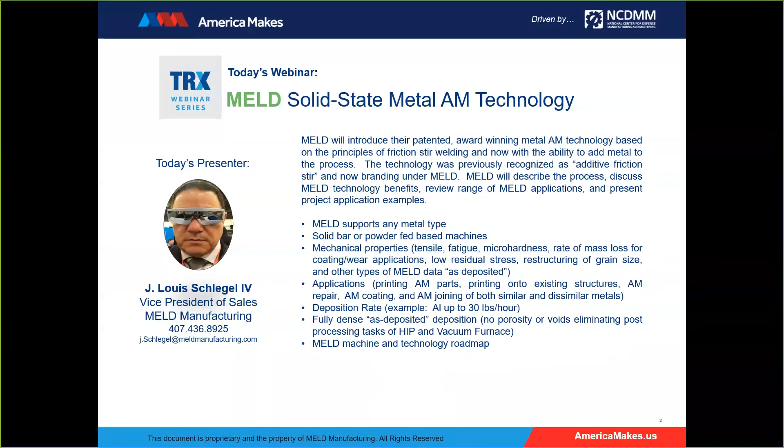I'd like to start off with a different way to start the pitch. MELD has been developing the technology for 10 years. We've been working with beta customers for 4 to 5 years. We've been selling machines a little over 2 years, at least began to launch our commercial machine about 2 years ago, with University of Alabama being our first customer. We came out as a new company, MELD Manufacturing. We were previously branded as Additive Friction Stir, and of course we wanted to create our own vocabulary, so you have to say the word MELD. That's the story behind MELD.

We're a small business, woman-owned. What I like to do is just say we came out in April, and within a week we were awarded the AM Innovator of the Year award at the Rapid Show down in Fort Worth, Texas. We were awarded a golden award from R&D 100 called the Market Disruptor, as well as an R&D 100 winner. The Automobile Association has given us an award through SAE Tech Briefs.

My point is there's lots of additive manufacturing technologies popping up, kind of like the whack-a-mole fair game, if you've ever played that before. And you don't know which to spend time on, which to invest in, which to spend resources towards evaluating technology. So I just start off with saying, in less than 10 months, for all these awards to migrate over to MELD, our technology may be interesting. My goal here is to present the technology so you'll agree that it is interesting.

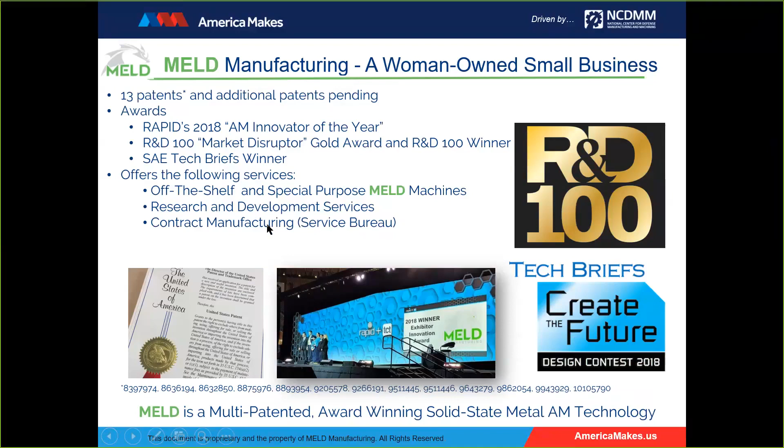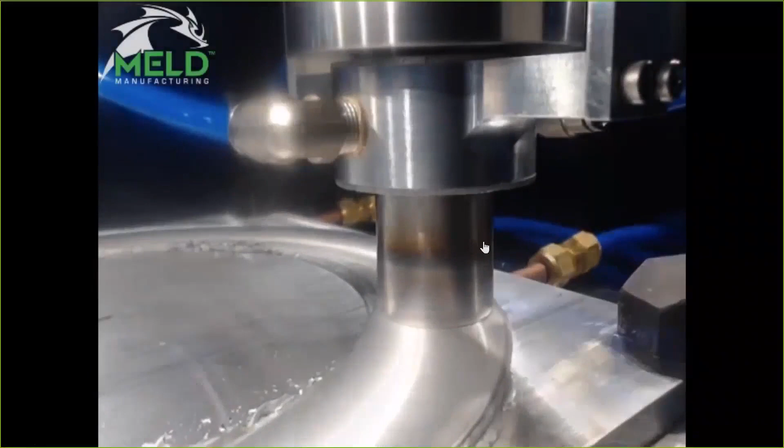I'm going to start with awkwardly flipping over to my browser to show you a video that shows the process. You can see the MELD tool spinning at high RPMs. We monitor two main variables: RPM or torque speeds, and then with a ball screw or with a linear force. And we deposit any metal type, I'll get more into the mechanics.

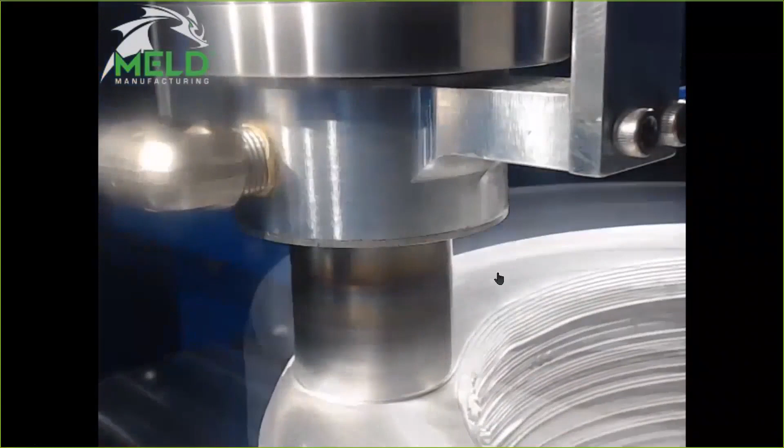But here you see us printing aluminum 6061. The Z-axis height is about 1 millimeter each. We're a high-speed deposition process. We've achieved with aluminum up to 30 pounds an hour. That's pretty darn fast. It doesn't mean every application is 30 pounds an hour, but that basically assumes a 2-inch wide track.

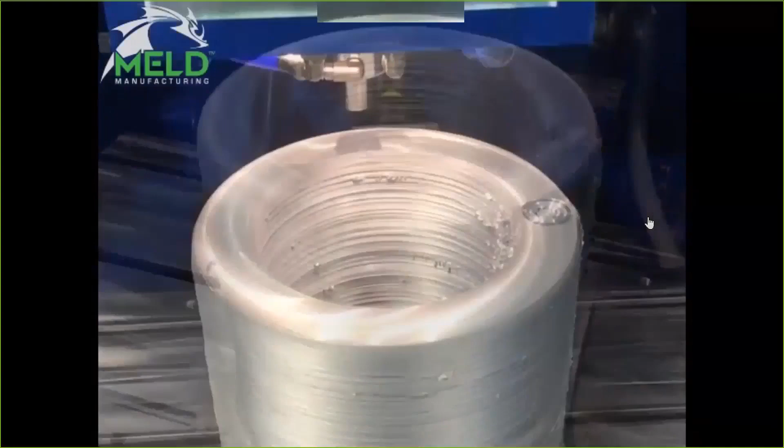So right there you just saw a video, let me get that out of the way now, sorry, of a project where we just recently printed a 285-pound cylinder. That's as much as I can go into at this stage, but it has obviously an end-use application, and we were permitted to show that little video there.

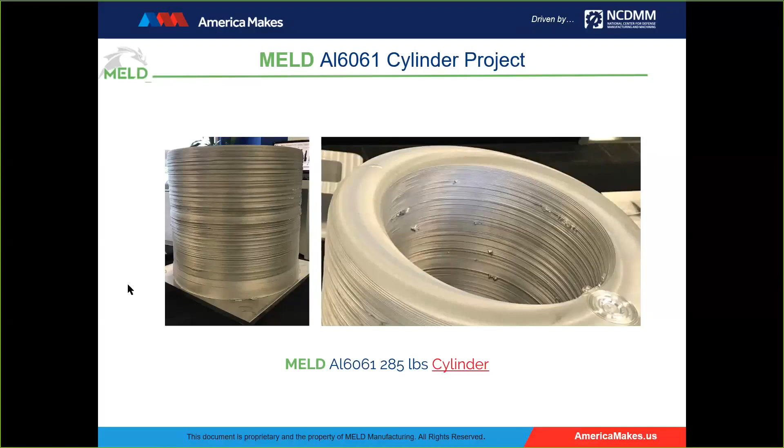And now to get back to my presentation. So MELD is a solid-state metal AM technology. It's an emerging disruptive process because we extend the applications of friction stir welding, and now we transition to an additive manufacturing repair process, enabling previously unjoinable configurations by allowing us to add metal in situ.

A friction stir welder has a solid tool with a solid nub. Ours is similar, except we have a hollow cylinder, and we insert a solid bar or powder into it. At the bottom, that pin is our feedstock material that we're adding to the application.

So again, you see the example here. Now we're making a rectangular platform, but through RPMs and linear forces, we're able to heat that material via friction forces up to about 80% of its solidus point, and then we begin to print the metal. So we don't melt it. That's the key to our technology. We don't melt it, and therefore it's a solid-state technology.

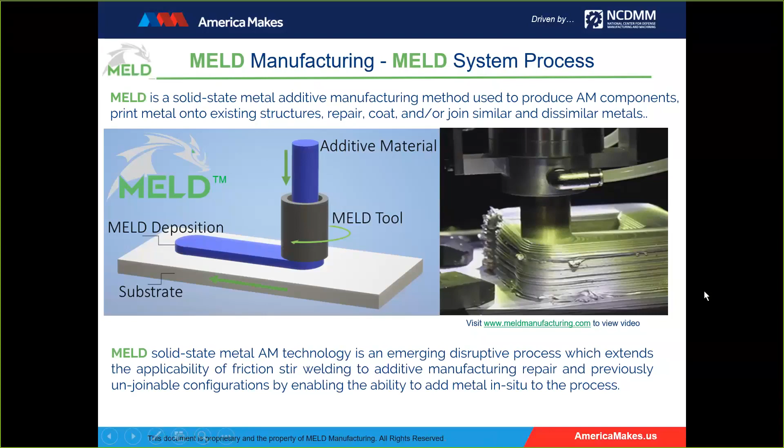With that, we're able to configure it with a solid bar or a powder. We highly recommend the solid bar because it's a lower cost raw material, readily available off the shelf from various sites. You can find 3/8 of an inch square solid bar readily off the shelf. But again, we can add powder hoppers to our machines. We're not picky—it can be fine or coarse, from nano to a couple of millimeters in sphere volume.

We're able to process both solid bar and powder. But again, the solid bar, because it's less expensive, has less handling issues and less storage life issues with respect to the powder. Still, it's a multi-feed process, either solid bar or powder.

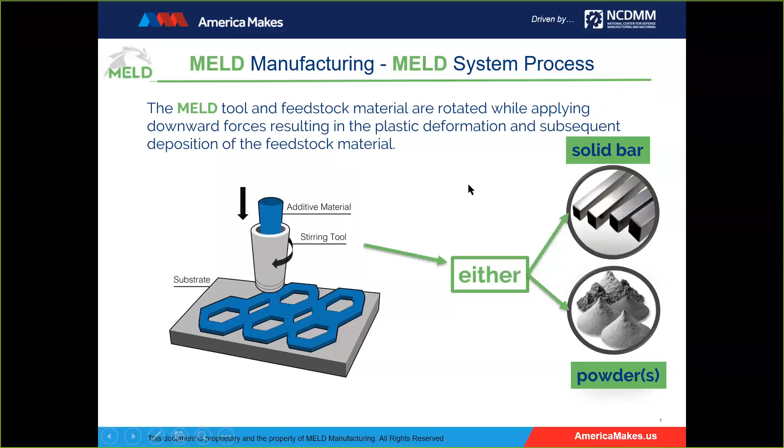Whoop, whoop, whoop, whoop. Sometimes I throw in sound effects.

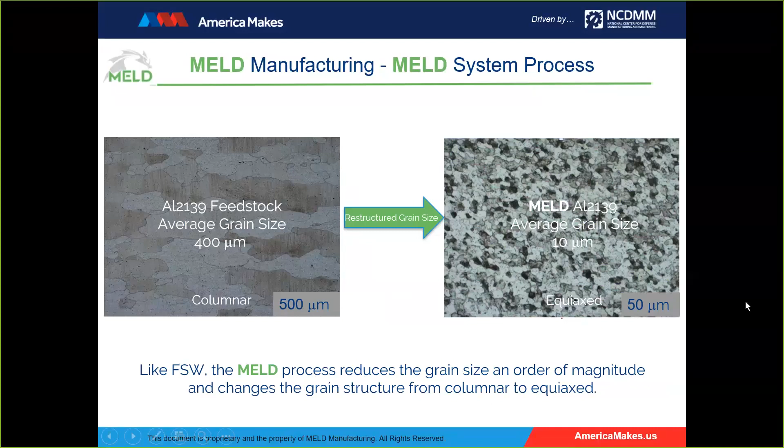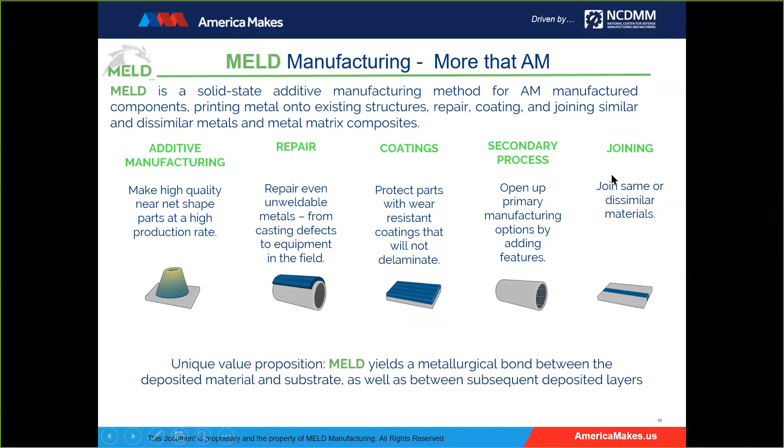All right, so what do we do? We have a wide range of applications. I have some slides on each of these, but here's just a quick overview. We can manufacture near-net shaped parts. There's large demand on our repair side because of the ability to repair unweldable materials, with examples. Coating has been a home run with regards to rate of mass loss. As a secondary process, we can print onto existing structures or components. And again, joining, as noted with the friction stir welding capabilities of our equipment.

Now to get a visual on some mechanical properties—one of the things we claim is you can choose any metal type, and I might repeat this like a Southern Baptist pastor a few times as I go through the series of benefits, but choose any metal type. We can use any aluminum metal type. On the left, I've got a cast aluminum, a couple of powder bed aluminums, and our mechanical properties of AL7075. I want to point out we're not comparing apples to apples—7075 should be a much stronger material, but again, you've got the flexibility of using any metal type, and a visual showing really good mechanical properties.

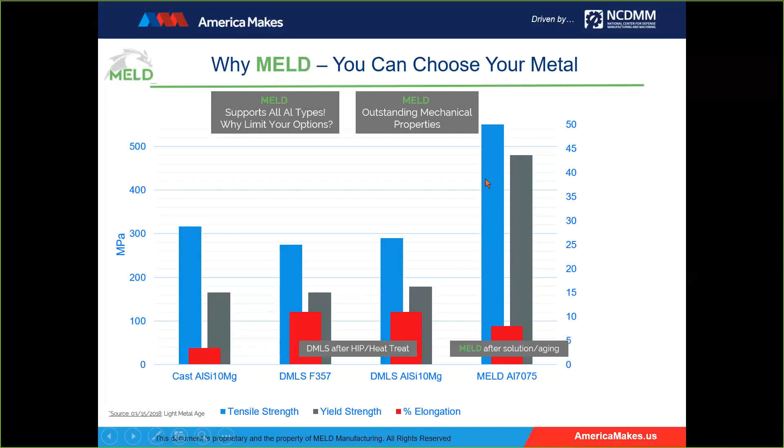The next slide is very similar—same cast, same powder bed, AlSi10, and now you see that same 7075 as-deposited and after our heat treat. In many cases, our as-deposited mechanical properties meet the required mechanical properties without a need for heat treat. And if we want to bump it up, we have our own custom blends of heat treatments to improve the mechanical properties.

So again, a quick overview—you choose your metal, and here's a comparison of other technologies, shown as deposited or with a heat treat.

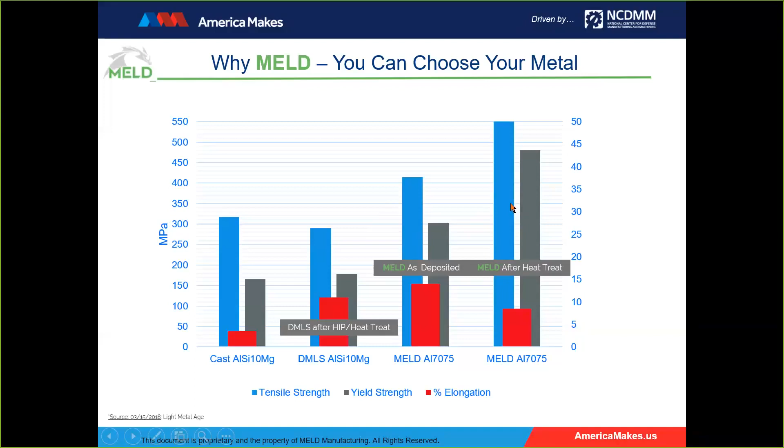It's got really good mechanical properties. I hope to expand on that in a little bit. So far, aluminum is the only material that we've heat treated. The rest of the materials' mechanical properties are well above the threshold without the need for a heat treat protocol. I'll show that with Inconel 625 coming up.

Again, choose your own metal, any metal type. This is just a snapshot of some of the metals we've worked with. Friction stir welding started off with aluminum, so we started off with aluminum too. We've got a lot of data on the complete families of aluminum, including NAB, nickel aluminum bronze, for like a Navy propeller shaft or propeller, magnesium, copper. We've done work with titanium, steel, nickel, and a number of MMC composites, which I have one slide on coming up.

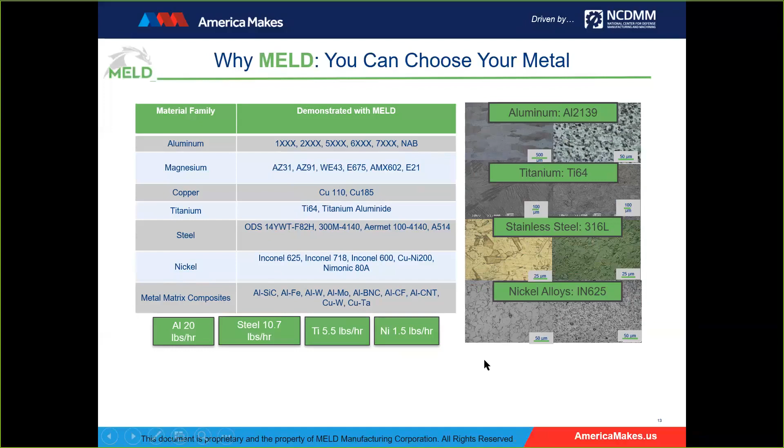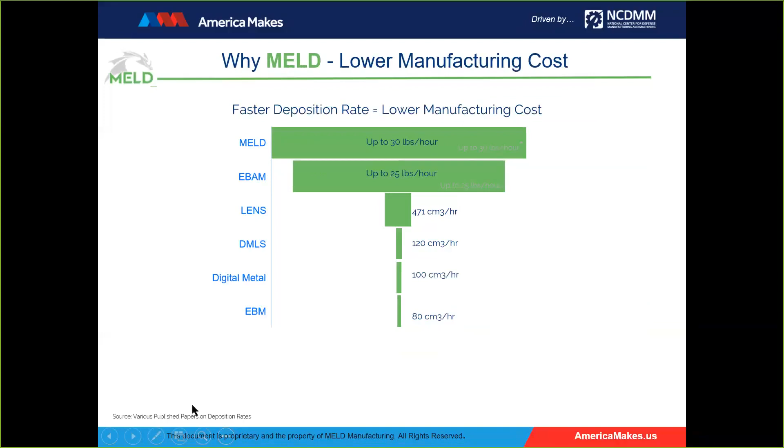So again, it's any metal type, with a fast deposition rate. I mentioned 30 pounds an hour. Here's just a visual on deposition rates of other technologies. I put my sources on the left-hand side, so I'm pretty reasonably accurate with all my data.

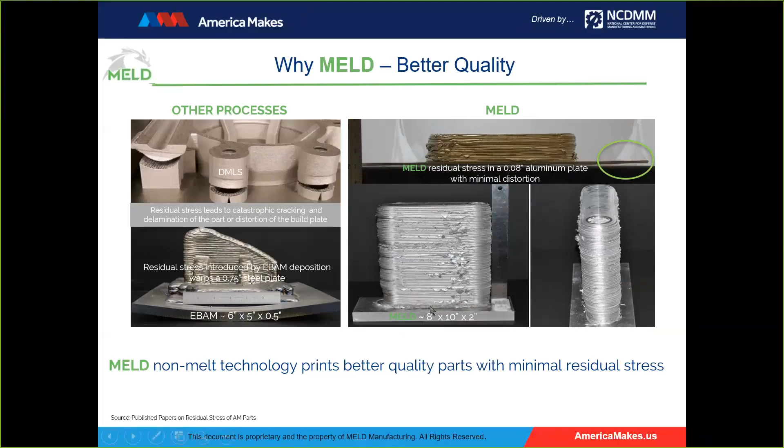And in fact, we did a project a couple of years ago where we incrementally reduced the plate thickness to see when we would observe residual stress, and we got down to 0.08 of an inch, a very thin plate, before finally showing signs of residual stress with a little uptick on the outside part of the plate. Again, don't want to oversell this - we're a solid state technology, we don't melt the material, so you should expect low residual stress, but there's some visual verification of that.

I'm going to get into some applications now. I'm going to go through a couple of repair applications because we found surprisingly large demand for this, especially in repairing cast and forge, replacing cast and forge applications, and repairing cast and forging molds and so forth. Here's an example to hit home on the technology in terms of addressing unfriendly materials.

Here's a cast magnesium helicopter transmission gearbox. That rib is prone to failure. The moment it cracks, it becomes an $80,000 piece of scrap material because magnesium is unweldable. But it's not unmeldable - we use the same cast AZ91 magnesium. We machined down the rest of that rib and deposited a number of layers, that's a 1/2 inch track here, of the same material. So again, any metal, or we can use the original indigenous material for repair, so there's no politics about a substitute material. If it's magnesium, we use the same magnesium. And that was a home run - we demonstrated the ability to repair that magnesium-based application.

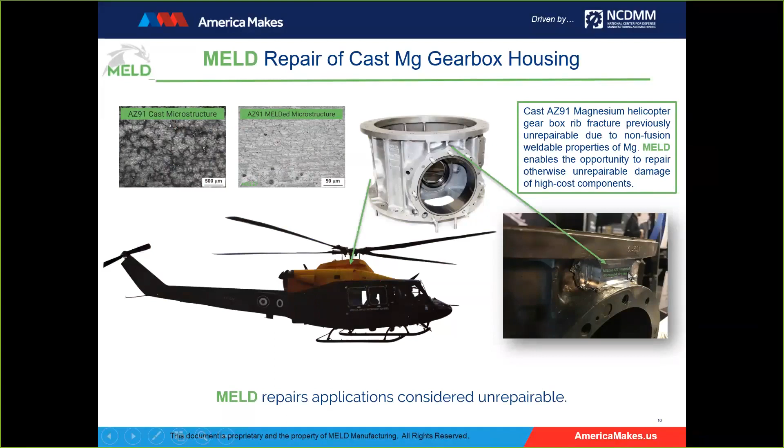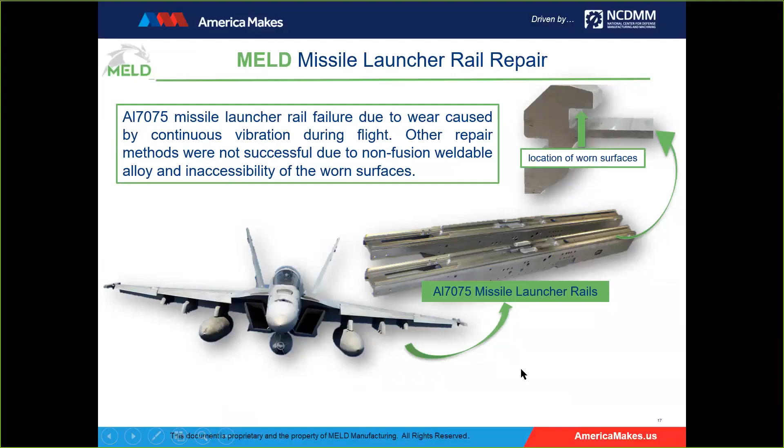Another example had a two-hit challenge: another unfriendly material for repair, 7075, but also the location. I call it the location from hell, because the underneath of that bracket wears over time from flight vibration. There's this 7-foot long missile rail launcher, just a series of long brackets. You're sliding the missile into that rail - it's on the jet fighter - and with vibration over time, it begins to wear out the underneath of the bracket. So how in the world did we solve that problem?

MELD has a couple of amazing, miracle benefits - sorry for hyping that up a little bit. We placed the MELD tool on top of that. It's about a 1/2 inch gap, or a 1/2 inch thick bracket. We put the MELD tool on top, a 3/8 inch solid bar of 7075 aluminum, and began to push material from the top, extruding it through the bracket.

We push out the worn material below the machine line, machine it back, and voila, home run for MELD.

We demonstrated the ability to repair unfriendly aluminum at a location that was very difficult to get to. That's about a half an inch, and we pushed material through, because I'm going to show another example of repairing a Navy propeller where there are lots of pits significantly less in depth. I'll reference that when I get to that slide.

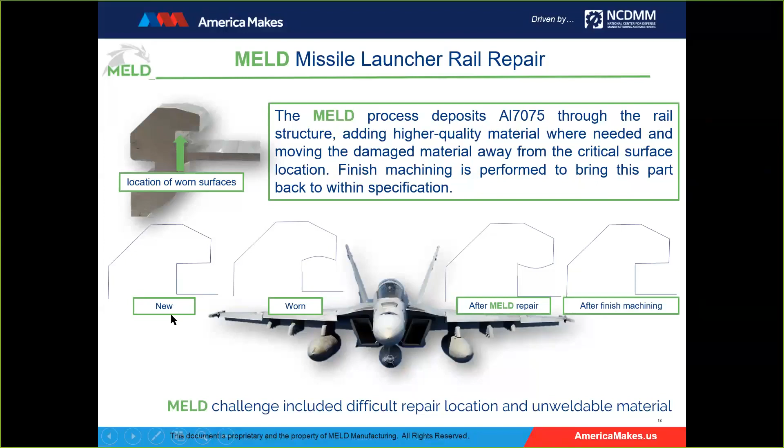Here's an example with the Army where we demonstrated the ability to repair combat vehicles, mostly aluminum 2024. We were given a plate with a series of simulations of armor-piercing holes and a variety of cracks. We deposited fully dense material.

Okay, there's my next one: any metal type, indigenous material, now fully dense. And that's a weasel word because it means many things to many people. Our definition is no porosity, no voids. There's no need for a post-HIP or vacuum furnace, and that's what fully dense means to us. We get better than wrought mechanical properties, which I'm going to show coming up.

The main purpose was to demonstrate the ability to repair combat vehicles in the battlefield, and we passed this first round of tests.

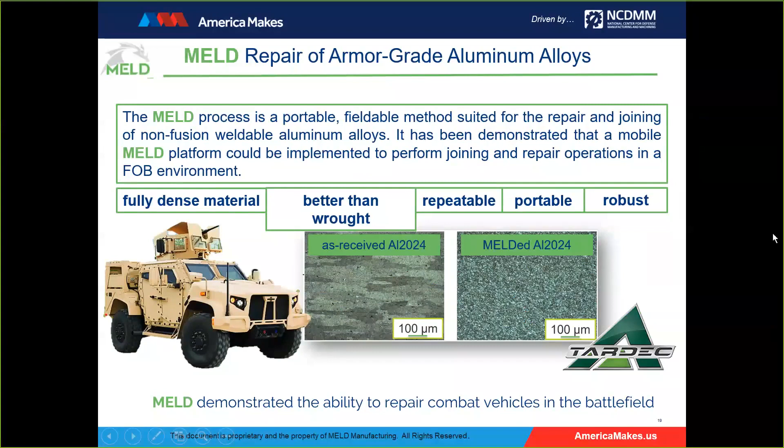We've gone into a SERDP project where they're actually taking battlefield scrap and shredding it into little chips, little scrap pieces. You can see it's not very attractive. Again, we said any powder type — we're not picky, from coarse to fine, and that certainly meets the definition of a coarse material. We demonstrated the ability to print that recycled material.

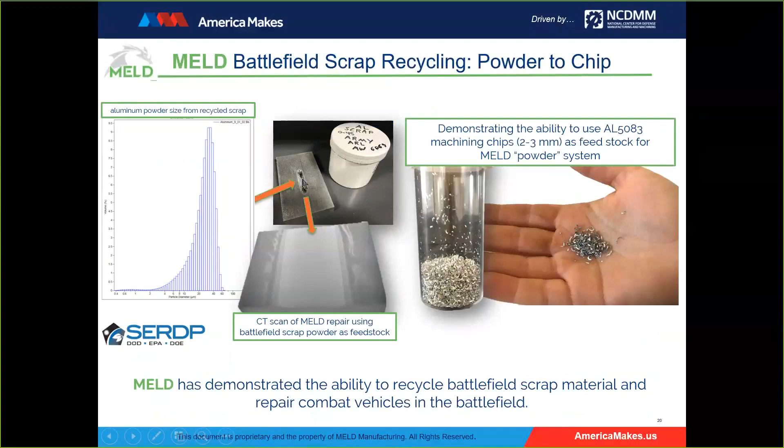So putting that all together, we're looking at now with the Army setting up a machine to place a large robotic arm on a transport vehicle, attach our MELD head to it, and repair combat vehicles in the battlefield. For instance, if this tank had a large section missing, we could print a near net shape part and meld it into place at the closest MRO to the battlefield.

So that's kind of a visual about where we're heading with some of our purpose-built machines. That machine would also have the ability to add hybrid tooling or subtractive manufacturing. I think in the battlefield, no one's going to worry about how pretty it is — it's just that we melded it with the same 2024 aluminum.

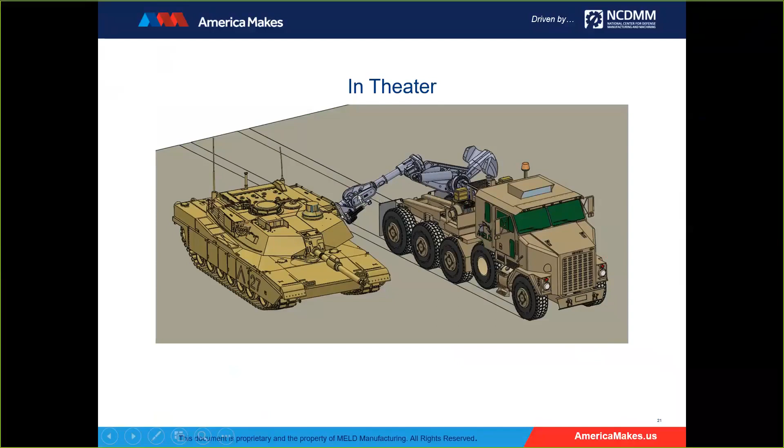I'm going to get into some coating. I just do a family of repairs, many more, but I'm time limited.

So here's an example of coating. What I see here, we start off with the traditional cold spray, thermal spray, and MELD, all using Inconel 625. I've got a series of about five slides coming up on a project that hits all the highlights of the MELD process benefits. So I look at cold spray and thermal spray, and you see the traditional challenges with the technology in terms of voids and porosity, and depending on the surface area of the application, a reasonably long time to prepare that surface before the coating.

By comparison, we do no surface prep. We immediately meld the material onto the application. We get a fully dense bonding because at that interface, we plasticize both materials. In this case, this is the Inconel and this is HY80 steel. So we're joining dissimilar metals, plasticizing them both at the interface, creating a strong metallurgical bond.

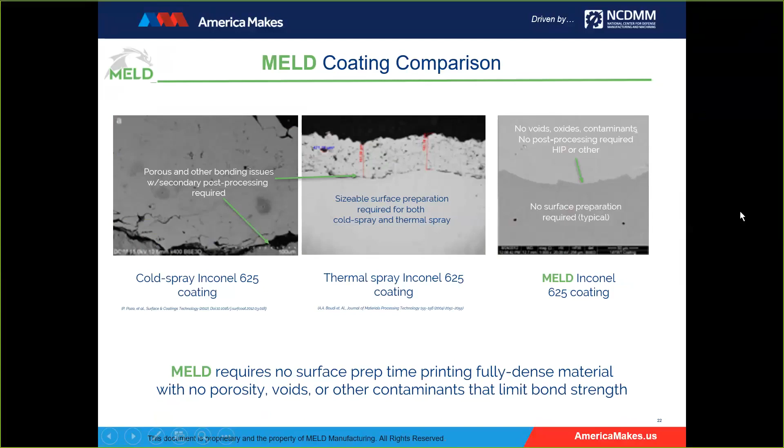Now I'm going to walk through that application to point out all the capabilities of MELD. We got engaged with a Navy submarine propeller shaft made out of HY80, coated with Inconel 625 for wear resistance. I'll start off with, we had a sample that was corroded.

You just saw this on the other slide. We immediately deposited with no preparation, fully dense, which to us means no voids or no porosity. We have eliminated any pathway for corrosion to work, and any way for porosity. So I'm emphasizing here how we handle corrosion — in this coating application, there's no vehicle, no pathway for the corrosion to work back to the surface.

Here's a snapshot of the mechanical properties. Here's the prevailing technology, slag surfacing. Our mechanical properties exceptionally exceeded the requirement. Don't want to oversell that — that's the spec, so unfortunately all I can say is we exceeded the mechanical property requirement.

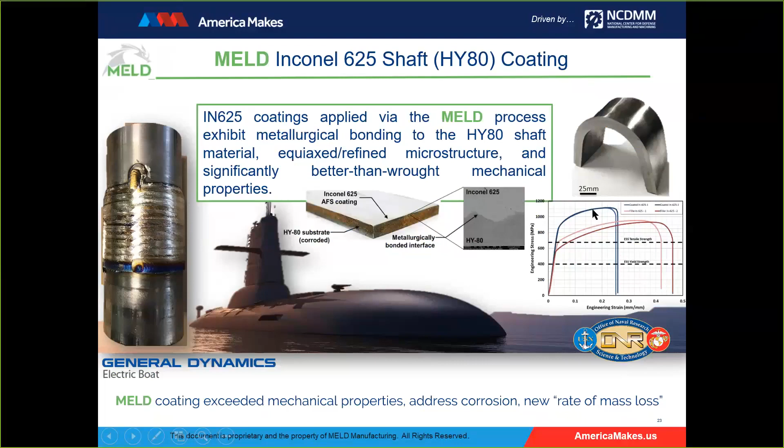Of course, we passed the bend test in terms of no delamination or cracking. Again, we get a strong metallurgical bond. So you now begin to see the interface layer between the Inconel coating and the HY80 submarine propeller shaft — you see layer to layer.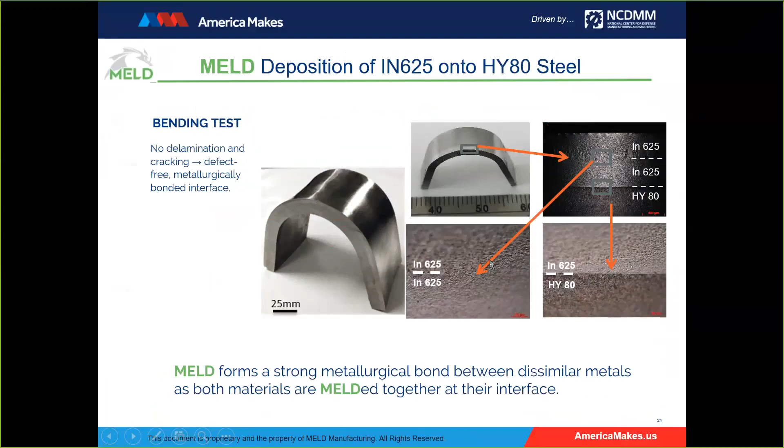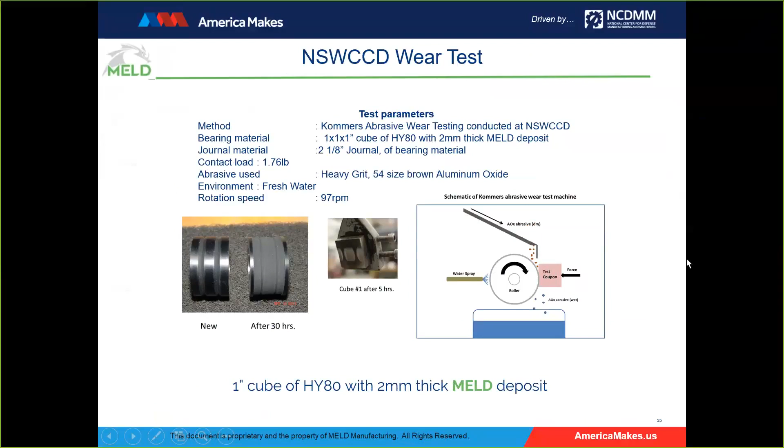But the whole purpose of coating is to get a lower rate of mass loss — that's the whole purpose of wear resistance. And so there's the standardized test: we took a one-inch cube of HY80 steel, we melded a couple of millimeters of Inconel 625. This is the wear test, and the results were pretty impressive — we set a new value for rate of mass loss.

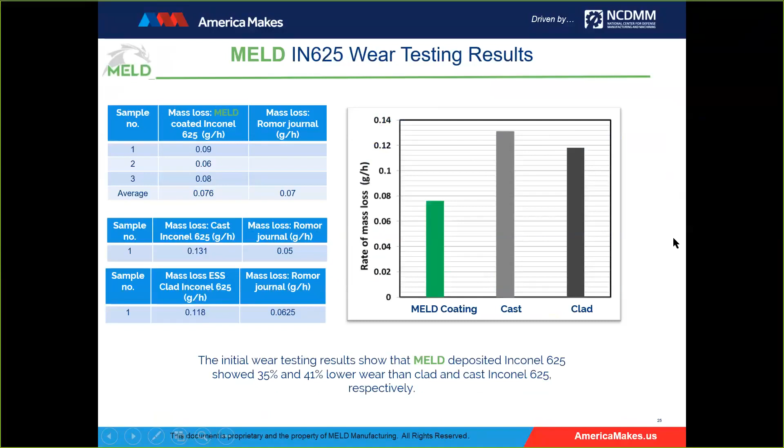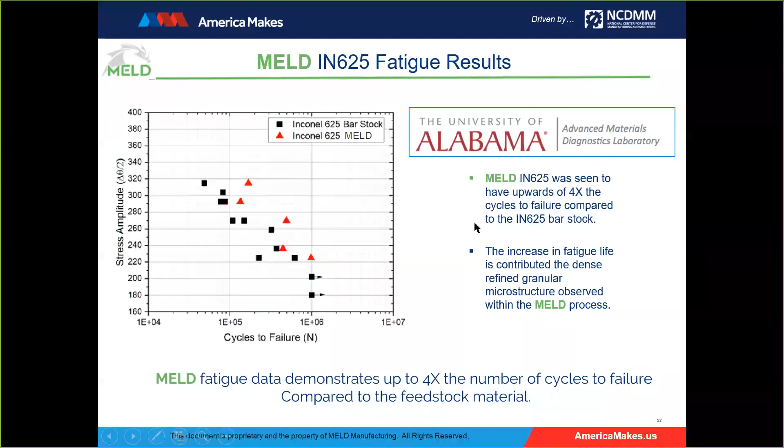Let's see if I have one more slide on that. Any metal type - well, Inconel 625 was chosen as a coating application, fully dense, no porosity, no voids, no HIP, no vacuum furnace.

Fully dense means, from a corrosion perspective, there's no pathway for corrosion to work back to the surface. You saw very large improvements in mechanical properties compared to the prevailing technology.

You saw fatigue data. You saw our technology compared to multiple applications here on this slide. And that kind of summarizes our technology in one application in terms of the benefits, up to the fact I didn't mention the deposition rate. Again, I showed that earlier - we're a fast deposition technology.

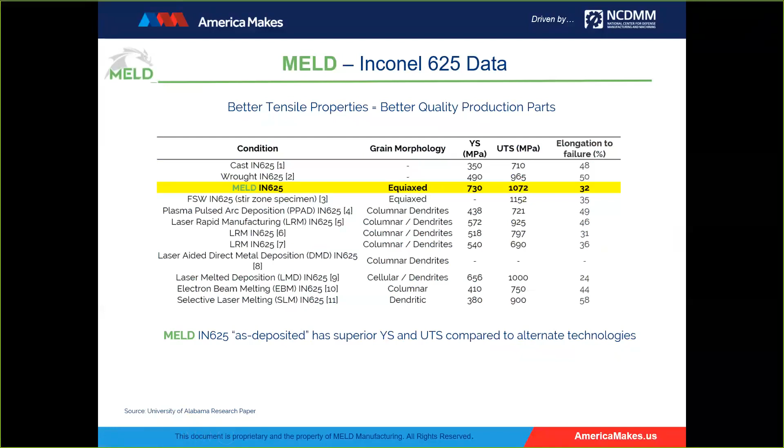Another coating application: a rail gun rail joining copper to refractory metals. Again, we passed the bend test and so forth, but I want to point out the shear stress results here in the slide - copper on copper, copper on tantalum, tantalum and copper on niobium.

The shear stress test specimens show the fracture occurred away from where we joined the dissimilar metals. You'd think where we joined dissimilar metals - the copper to the two refractory materials - that might be our weakest point of the test specimen. As you can see, it fractured away.

So again, we have good microhardness data, which I've got coming up, and really good mechanical property data. And now I'm showing, in this particular case, the strength of the joining process - joining the dissimilar metals, or copper to copper - again fracturing away from where we join the materials.

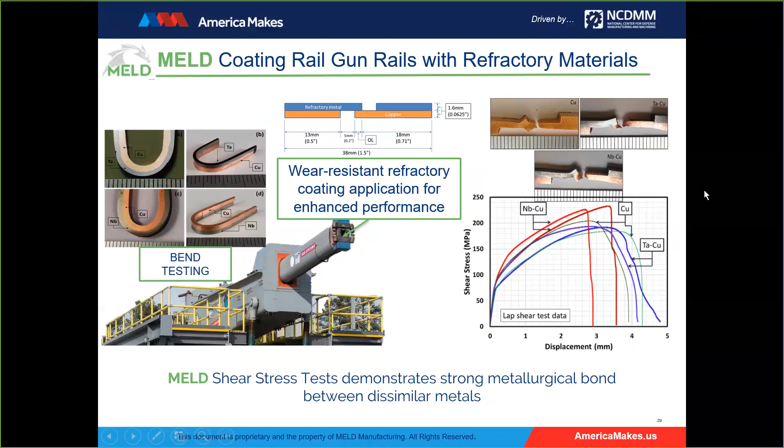Here's a repair application for the Navy. It's a NAB propeller - we were given a section. We don't have a machine that'll support that yet, just a section of the propeller, heavily pitted. You can see some orange in here, corrosion.

We came in with no surface prep. We began to meld half-inch tracks of NAB. We set a new value for microhardness.

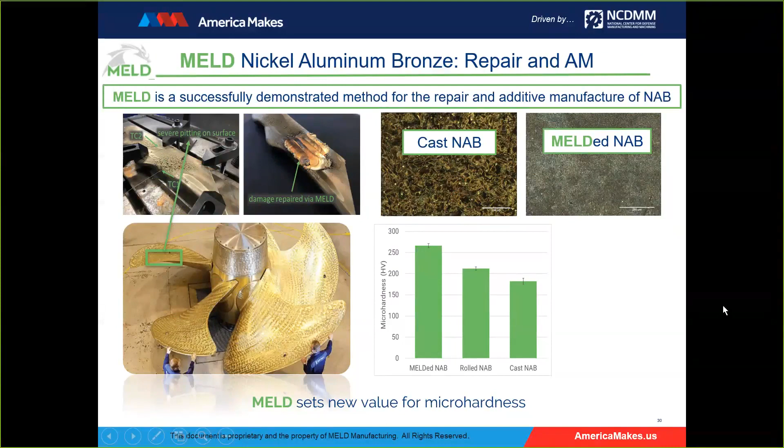There's that NAB material flowing across that NAB propeller. Now, we're not doing the side here, we're doing the top surface. And the one thing I want to point out - well, if I could do it.

One thing I want to point out, I'll play the video again. All right, I showed that half-inch thick bracket, extruding material through the bracket and pushing out warm material. I'm just suggesting that at the level of these pits, we are melding that material completely into those pockets and cavities.

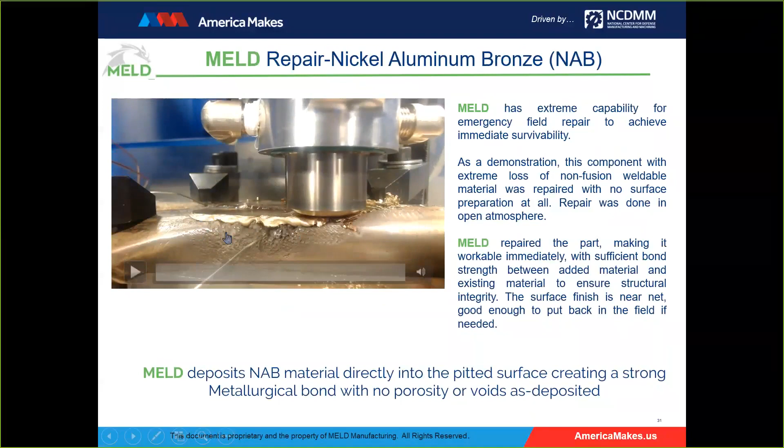In fact, the Navy wanted us to machine the propeller, print, and then machine it back to spec, and we said we prefer to give it a try - just printing and machining and save a step, because we're going to fill up those cavities and voids. That's where we're at with that program with the Navy.

Then we got, so in coating and repairs, another application is components. Here's an aluminum 6061 pressure vessel dome. It's got a 2-inch diameter hollow insert, about 1 millimeter layers. Near net machining - that's just a handful of mills to machine it to near net shape.

I'm always looking for something sexy about our technology because we're a fast deposition process. I mentioned aluminum up to 30 pounds an hour. We don't get a lot of complex applications, but in this case we were able to demonstrate a 54-degree overhang, totally enclosing the top of the dome with no supports.

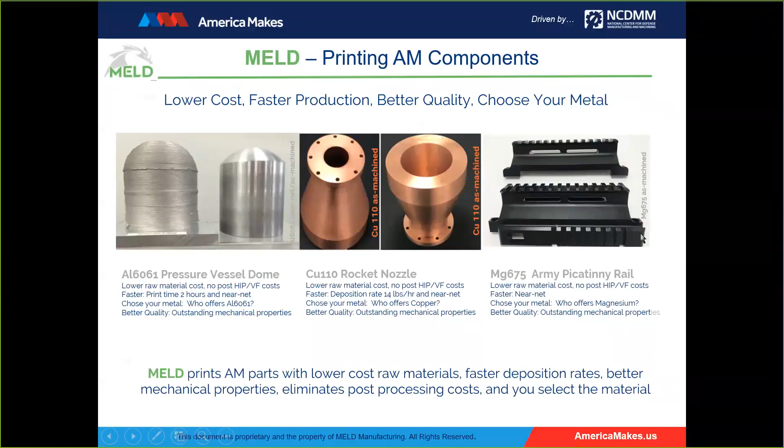Here's an example of copper on a rocket nozzle. Here's an example of magnesium where we printed some Army Picatinny rails for the assault rifles.

Here, now we're getting into printing onto existing structures or components. So here's the Orion crew module window frame - we printed features onto that frame. This is after machining, and each of these Z heights are at different levels.

As part of that window frame, you can see it attached here on the module. So again, now we're printing, or we're melding material into an existing structure. This is the home run that put us on the map with NASA.

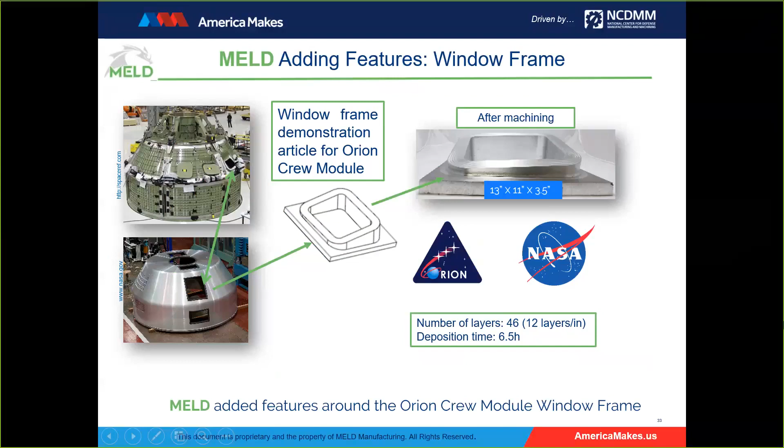They wanted to reduce their airframe thickness, obviously for less weight, better fuel consumption. They needed to add ribs for reinforcement, and we got involved with NASA a couple of years ago. Of course we were crowing, oh yeah, we can use the same AL2139 aluminum, and thought we had it nailed. NASA funded the project and sent us some airframe panels.

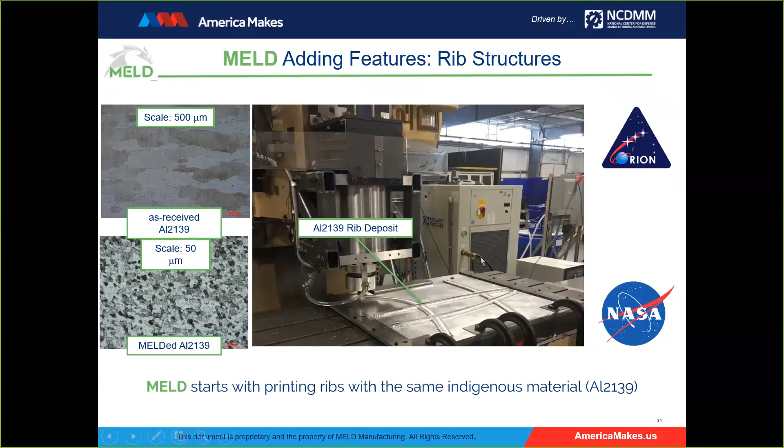Then they said we have to have a phone call. So we get on the phone and they say, congratulations. And I say, congratulations for what? Because we used the same 2139 material? They go, no, that's a bonus. We wanted to let you know that the whole intent of this project was to evaluate the mechanical properties at the intersection of the ribs. We've done this with other additive manufacturing technologies that melt their feedstock. You're the first technology to pass this test with no mechanical property issues at that rib intersection.

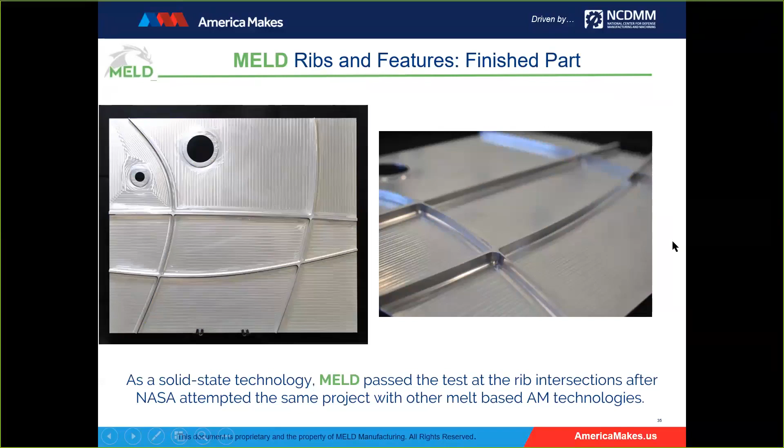Now again, we're going to print onto an existing structure. This is an automotive application. This is the rail of a large transport truck, and that's the cross member. So there's two rails and a cross member, and you can see it's a thin bracket and a thin rail. The client was having a lot of stress issues at the interface there between the rail and the cross member. Makes sense, thin rail, thin bracket.

What we did was we took a section of the rail. Here it is. Now we melded a good amount of material. We're going to attach it to both rails through that bolt opening, just like it is on the bracket. But now what we've done is we've eliminated two brackets, sixteen bolts, which is always interesting. But the main reason is we solved the stress issues here.

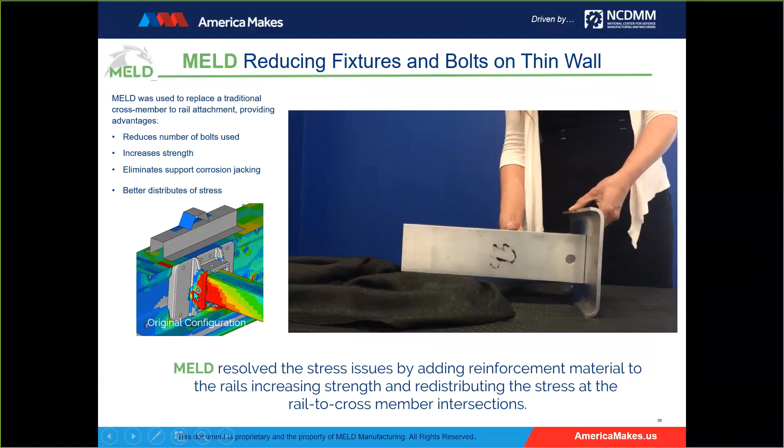We weren't permitted to show that slide, but you see the prior original configuration, and now with MELD, again, we just added a bunch of material, joined it to the rail through that same opening. We also addressed some corrosion jacking, again because we deposit fully dense material, there's no ability for that corrosion to work its way into and through the surface. See if I can get to the next slide.

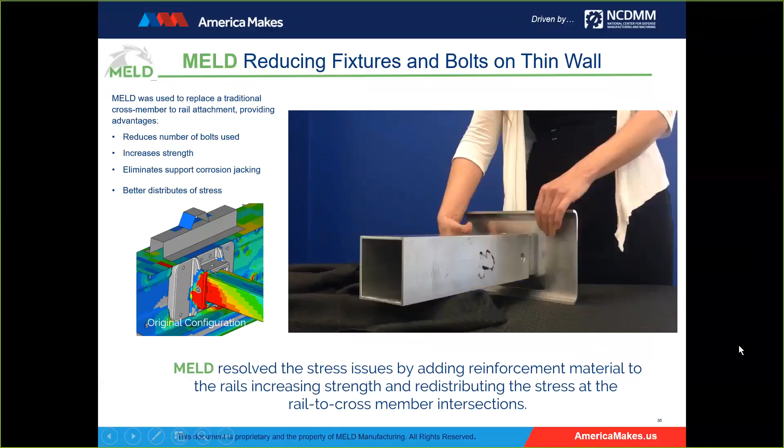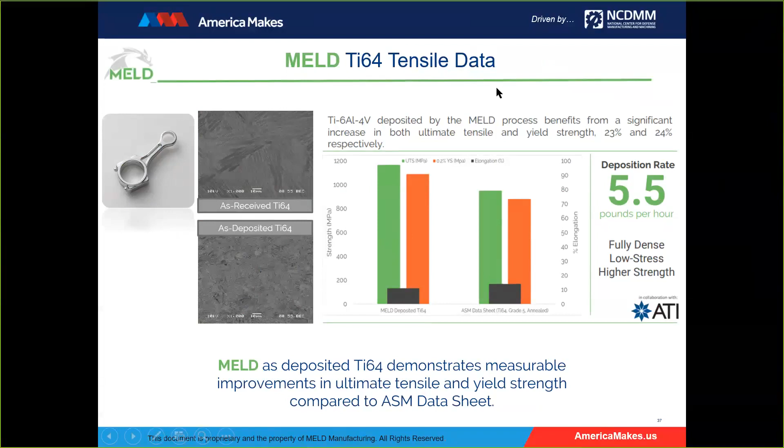We've currently achieved a deposition rate of 5.5 pounds per hour. The more we play with the material, the faster the deposition rate, as we optimize the parameter settings on our machines for titanium. It's kind of hard, we work with every metal and we can't master them all at once. I look at the Arcam machine, and they promoted titanium for two decades before they went into nickel alloys and other materials. Here we're addressing all materials in parallel, and we just haven't mastered them all. Again, we started with aluminum, magnesium, copper, the softer materials, and I've got more to say about that later on. But here's a project on titanium as a joining technology.

Okay, again, based on the principles of friction stir welding, but now our pin is not solid connected to the tool. It's our feedstock material coming out the bottom of the tool. And so we get 100% tool wear, which is a joke, because we are melding that pin, or our feedstock material, as the material to join the plates. Here's a couple of things we can do differently: you can have plate height mismatches, you don't have to have same height plates, we can add different height mismatches.

We can put a gap in between the plates to do a thicker weld. Here's an example of two aluminum 2024 substrate plates. There's the plate - sorry, that's the end of the plate, that's in the plate. So we have a gap here. We had a gap for a thicker weld. Of course, we passed the bend test.

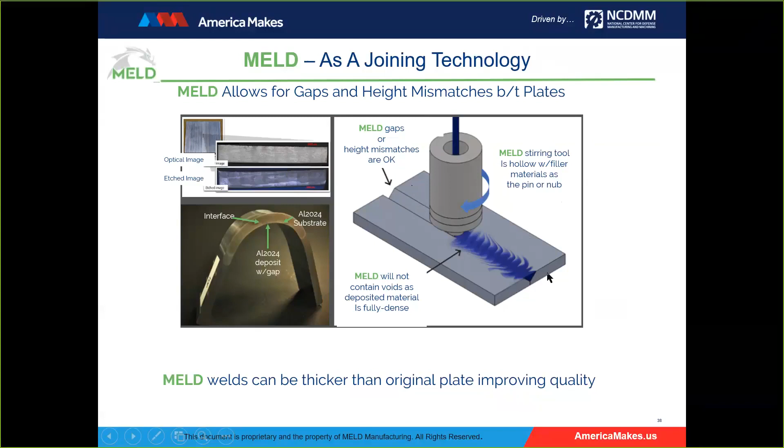No delamination or cracking. After we completed the process, via optical or an etched image, you see no signs of the joining. So what's important here is that we can also serve the same capabilities as friction stir welding, but now with plate height mismatches or a gap for thicker welds.

Again, as a joining process, we can join dissimilar metals. Here's aluminum and copper. Here's aluminum foam melded to a support structure. Here's joining some steel plates, which is interesting because with a friction stir welder...

Excuse me, I take a 5-second break. Sorry, I had to take a sip.

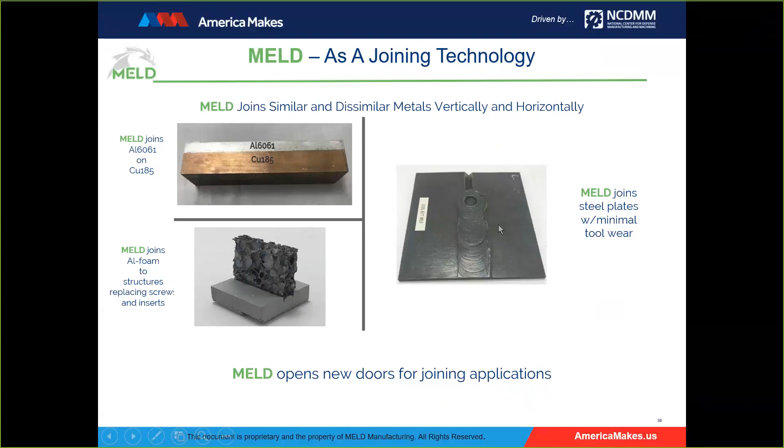All right, so we're showing the ability to join or meld those steel plates where the friction stir welding tool gets a lot of wear on the pin, and our pin is the feedstock material.

MMC work - well, we can add powder hoppers, do MMC work. If you're just hell-bent on using powders, you can use powders, but we typically recommend our mill machines for MMC work.

We have a client who says it takes them 6 months to get data on their MMC experiments via a cast process. And when he gets notification that the data has arrived, he's like, oh, that was 6 months ago. I'm way past that. I forgot about it. I'm not interested.

Well, we can print that in a day, and as fast as you can test it, you can have your data in a week or 2 weeks if you don't have the ability to expedite. You can see your MMC data in days instead of months.

Here's an example down here in the bottom of copper with about a 30% tantalum. That white is the tantalum. So you see a good homogeneous mixture of the two materials.

Here's aluminum with molybdenum, again the white being the molybdenum. So another good homogeneous distribution of the two materials.

Then aluminum with tungsten. I think what really sets us apart in terms of MMC development is we did a project where we took aluminum and added 10, 20, and 30% increments of silicon carbide as a reinforcement material. The data shows, as you'd expect, the higher the percent increase in the reinforcement material, the better the mechanical properties.

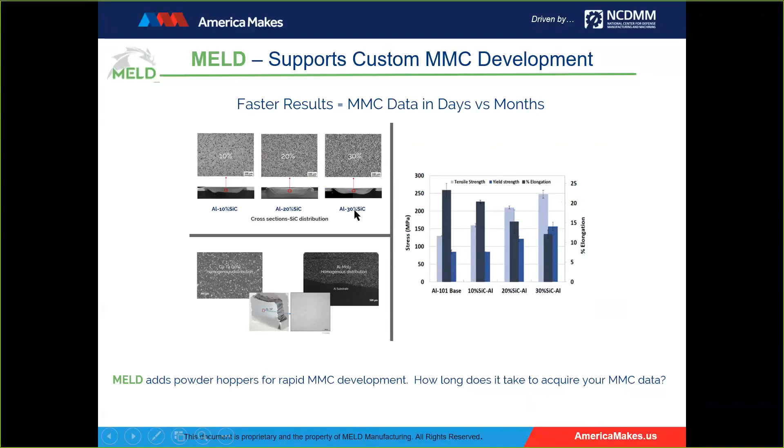So with your MMC development, you're able to find out the right best-fit combination for the parameters you want to hit, in terms of the base material and the mixture you'd like to make with that particular MMC composite. Make sure it's good.

All right, so what do we offer? We have a commercially available model called the B8. It's an R&D machine with a print volume of 36 by 12 by 12 inches. For some additive manufacturing technologies, that's a good size build volume. For us, it's small - we're a CNC type gantry-based machine.

Our technology is scalable. No one's going to buy a 10-foot by 12-foot gantry-based system to print ribs on an airframe without going through their A/B allowables and their application development and that systematic series of data, before you say you've got enough data to build this part for a production environment.

So we designed the B8. This is our 4th generation machine - it's not like we just came out with a machine. 4th generation, designed to our specs, manufactured by MELD, and we target R&D facilities, universities, and institutional research facilities because they have their cluster of industry members, just like America Makes.

And those industry members are able to reserve blocks of time on the machine, develop their application and/or series of test specimens for mechanical properties. After you go through that phase of collecting all your data, then we talk to you about a specialized or purpose-built machine that can be multi-axis, with hybrid subtractive capabilities.

Yep, yeah, no, makes good sense. Good thought starters. You'd mentioned a couple of times in your most recent answer friction stir welding and the relationship or similarities to the MELD process.

In terms of qualification, if friction stir welding is qualified, as it is in some applications we're aware of for aeronautical purposes, railway, otherwise - is MELD technology then directly accepted, or have you found that full process qualification is requested? So, root of the question: if friction stir joining technology is acceptable to an application space, have you had any scenarios where you've been able to use the approved qualification process and introduce MELD instead?